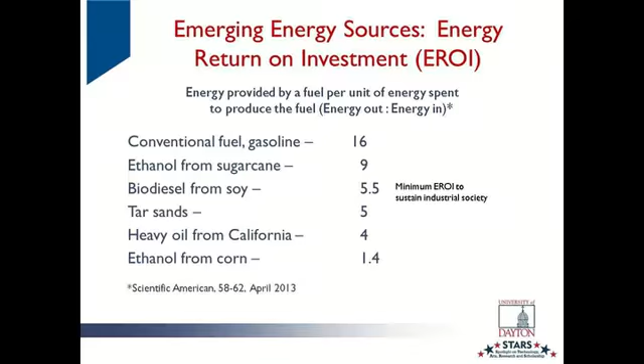And then there are other fuels which are being developed. And you can see that ethanol from corn is 1.4. Now, 5.5 is a kind of minimum EROI to sustain industrial society. What does it mean? If we push for these sources, we have to subsidize them. And if we have to subsidize ethanol from corn, we have to take money out from some other sources from the economy, for example, education or research. So you can see that some of the things which are being talked about may not have much merit. So let's move on to the fuels that we use for transportation.

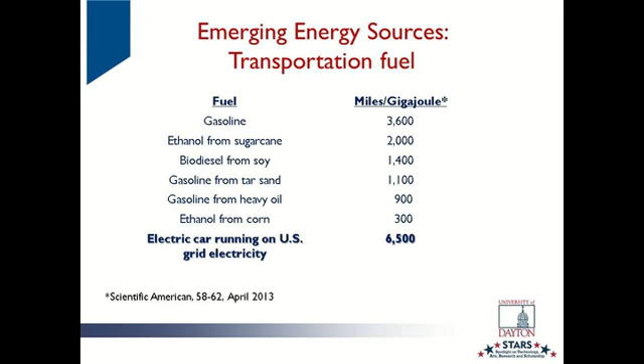Now we are going to focus in on transportation. And here in this table, I have miles per gigajoule. This is the miles one can get per gigajoule. You can see that from gasoline, we get about 3,600 miles. When we go to ethanol, it's 300. It's quite bad. And then right in the bottom, we have electric car running on US grid electricity. And you can see that this is 6,500. It's quite impressive. And this explains why there is so much interest in electric vehicles and electric transportation.

Now, if for the time being we ignore how we produce electricity, this electric vehicle makes a lot more sense. However, we have an option. We don't have to use dirty coal to produce electricity. We have alternate and sustainable energy sources. And these could be solar and wind.

And this reminds me of a conversation I had with a friend of mine about maybe 7 years ago. I told him then that, look, this should be looked at. This seems to be very interesting. And he said, these are all feel-good technologies. And I said, well, at that time, solar was some 1% and wind was 2% or something like that. I said, that may be true now, but if it is nurtured and developed, it could be significant.

Right now, I think the world power generation from these two sources is over 5%, approximately. This is a crude number. And it's coming up. There are 100 countries in the world who produce electricity from solar and wind for commercial purposes. So these are not something we can simply ignore.

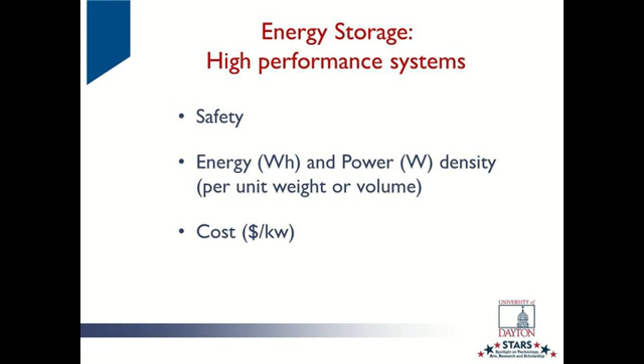And then, of course, cost. It has to be really cheap. It has to be dirt cheap. So when we combine these three factors together, that's what gives high-performance battery. And we have been working on it.

A brief outline onto the historical development of battery. There are two technologies which have similar chemistry, basic science, the batteries and the fuel cells. In the fuel cells, the reactants are flowing; in the battery, they are contained. There have been attempts made to make hybrids of batteries and fuel cells. And here are some of the things that have been done in the last 30, 40 years.

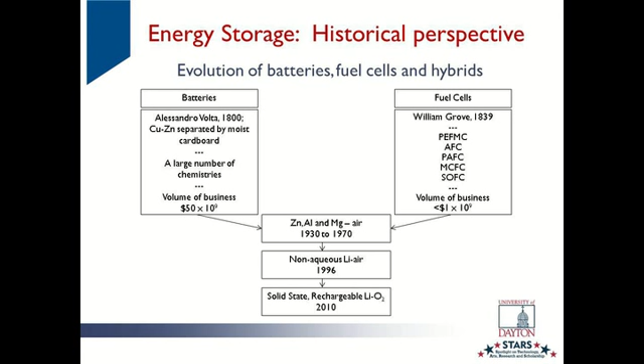We have focused on to the solid-state rechargeable lithium-oxygen battery. Why solid-state? I said it has to be safe. The solid-state battery gives you the safety. It has been known by the battery people that liquid is the origin of all the fires and all the problems with the batteries. So that's the reason we have focused on to the solid state.

Then lithium oxygen. Why lithium oxygen? Lithium oxygen gives theoretically the highest energy density. And so this is important. We started our activity a little earlier than 2010. We have our first paper published in 2010. So that's the reason we have that number over there, 2010. OK.

Just few words about a lithium oxygen cell. We know about the hydrogen oxygen cell. It was discovered in 1839, so it has been there for a long, long time. In the periodic table, lithium is just under hydrogen. So a lot of people thought that if we could use lithium instead of hydrogen and get some power out, it would be nice. So that was number one reason, because of the explosive nature and the gaseous nature of hydrogen, and lithium being solid, it's a lot easier to deal with.

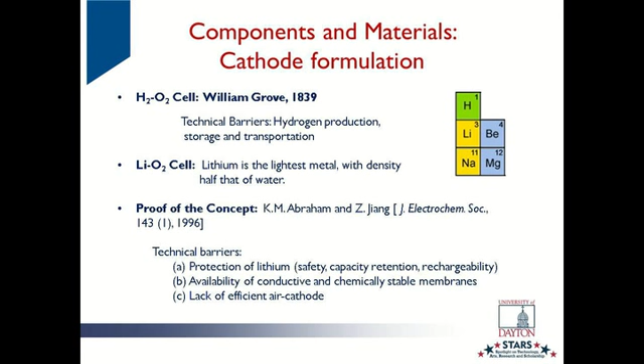Lithium is very reactive, so it has to be contained, and the safety, as I discussed earlier, is important. Then the conductive membrane, I'm going to go over it in just a minute or so. Then the lack of efficient air cathode. We need to have a cathode which can carry on the electrochemistry, and then move on to the next one.

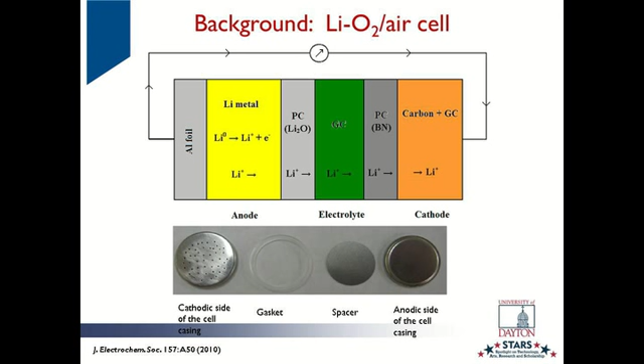So this is the first time we put together a cell. A cell has basically three components: anode, electrolyte, and cathode. Before we got into this, we were working on the electrolyte for a number of years, and you can see that we have three layers of electrolyte, because one layer has to be provided to take care of lithium, and the other layer to connect it with the cathode. So in this case, we had developed a material called LAGP, and I'm going to say a few words about it in the next couple of slides.

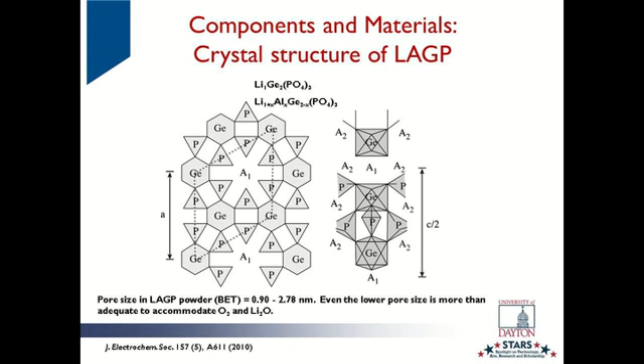In the lithium oxygen cell, there have been reports out there that we can take oxygen from the air, carry out the reaction, and draw the power from it. But taking oxygen from the air creates its own problems because of water and carbon dioxide. So we have designed a sealed configuration where we keep the oxygen in the cell, and we carry out the electrochemical reaction in a reversible manner.

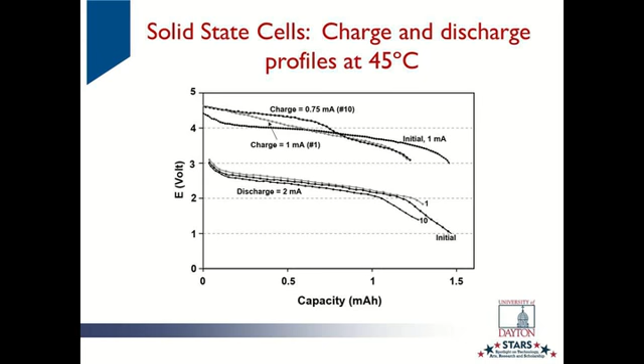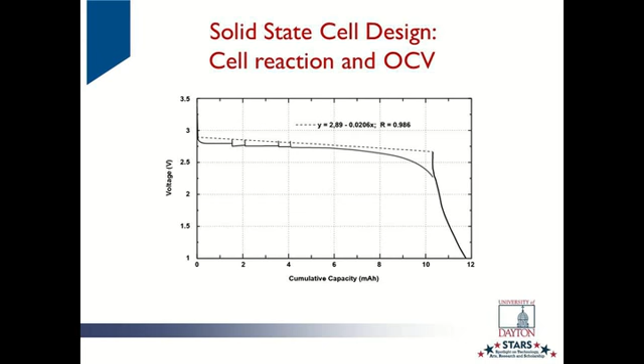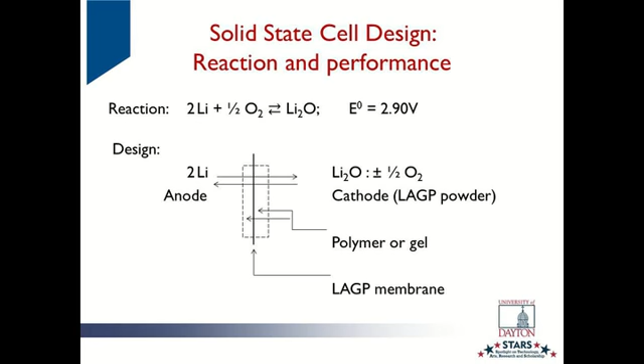Okay, so let me summarize. The energy storage system plays a critical role in the societal energy needs, and deployment and large-scale application of alternate energy sources greatly depend upon the availability of high-performance energy storage systems. We have developed a solid-state cell design. We have worked on the materials of construction. The chemistry is attractive for producing safe, high-energy density rechargeable batteries.

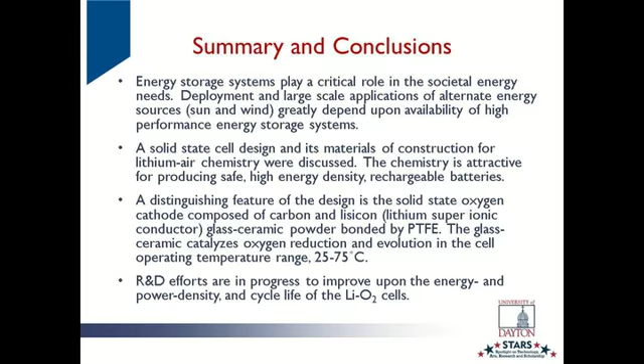The distinguishing feature of the design is the solid-state cathode configuration using the lithium LAGP material that I talked about. The R&D efforts are in progress to improve upon energy and power density and cycle life of the lithium oxygen cell.

Now, a lot of people have helped to bring us over here. As I said, I have been working on it for a couple of decades. There are a lot of people who have helped us. I would like to acknowledge the support of UDRI for giving us the facility and developing the battery research lab.